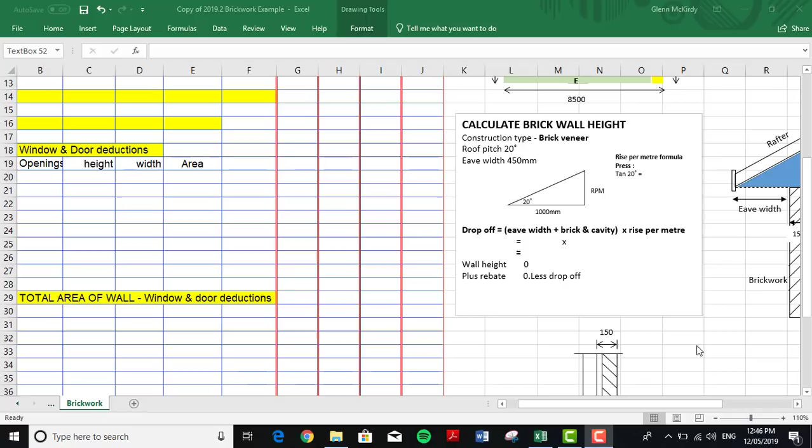Hi everyone, today we're looking at how to calculate brickwork. We've discussed this in class, and probably one of the first things we need to do is just determine the brick wall height. Now when we determine the brick wall height, we need to find out what the drop-off is. Now the drop-off goes from the top of the wall frame to the top of the brickwork. Okay, that's the drop-off height.

To determine this, it's just using the tan feature on your calculator. So because it's a 20-degree pitch, we press tan 20 and we get a rise of 364 millimeters per meter. Okay, now how we use that, there we have it there, 364 rise per meter. We want to find out this rise per meter.

So all we simply do, we times our rise per meter, which is 364, by our eave width plus this 150, which goes from the face of the timber wall frame to the face of the brickwork. Okay, now our eave size is 450. Eave width plus brick and cavity is 600. So we'll have 600 times our 364, and that gives us a 218 millimeter drop off.

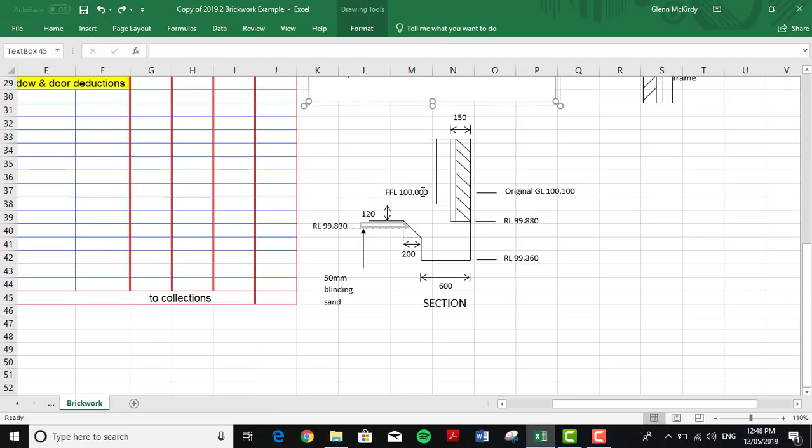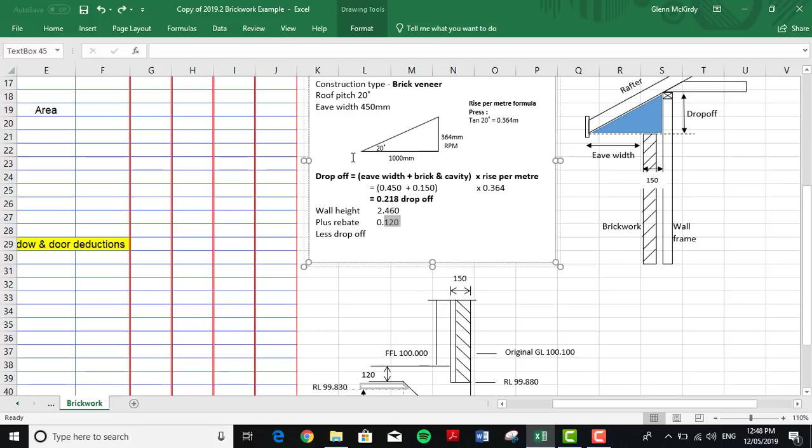Okay, our wall height as per plan is 2460. Then we go plus our rebate, and we find our rebate when we go down here. We've got the height of 120, but we can confirm that by 99.88, and the top of the slab, which the wall frame sits on, is 100. So there's a 120 millimeter step down there. So that's where that 120 millimeters comes from.

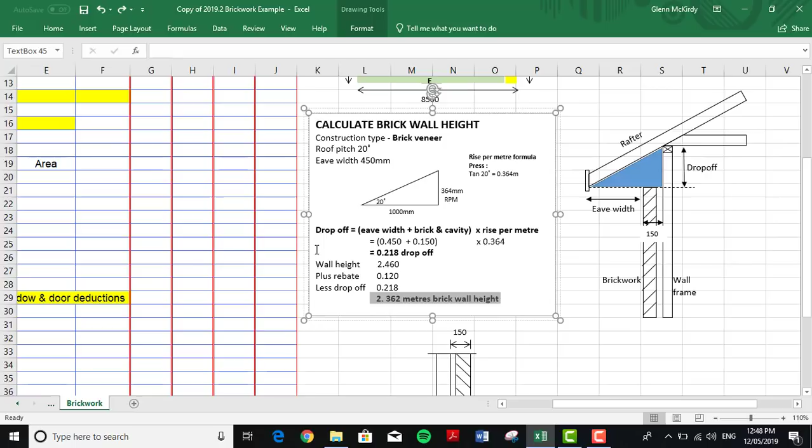Less our drop off, which we just calculated there, and this will give us our total wall height, which is 2.362. Okay, so that's important. So we'll come back to that. Now we're using the into-over method. We have our plan drawn here so we can visually see what we have to do. It just helps us, and every little bit of assistance we can get, we use.

So on our into-over method, first thing we do is we put down our A, B, C, D, E and F, which are our walls that go around the outside of the building. Then we put down our plan sizes. Then what we do, we come to our deduction, which is 110 mil, because that's the width of our brick. So we're going the width of our brick.

And on our internal corners, we can see that there is no deduction. 3.6 is from the outside to here. We've deducted a little bit there, but we've got the same amount added on there. So B and C, there is no deduction like all our other calculations. So they're our deductions. And then when we do the deductions, they're the figures we get. And then we get a total figure, total wall length using the into-over method of

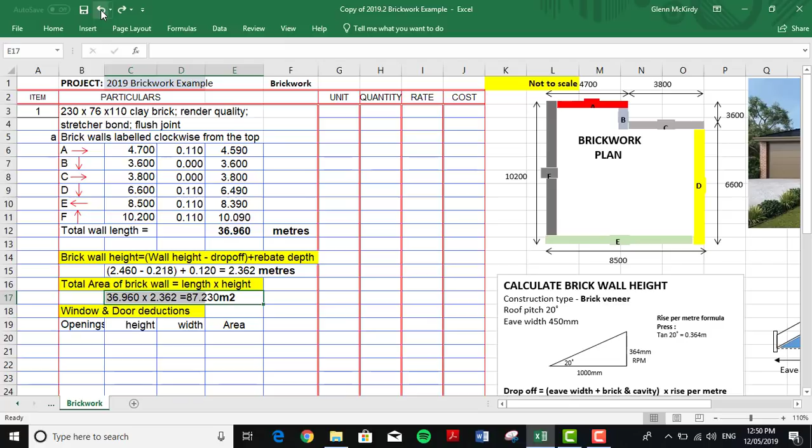36.96 meters. Okay, then with our brick height, which we've done the calculation over here, the figure that we got is 2362, and here we have it here. Now, our next step is we want to get the total area of the brick wall. So we have a length here and we have a height here. So we just simply times those two together, and we get an area of 87.23 meters squared.

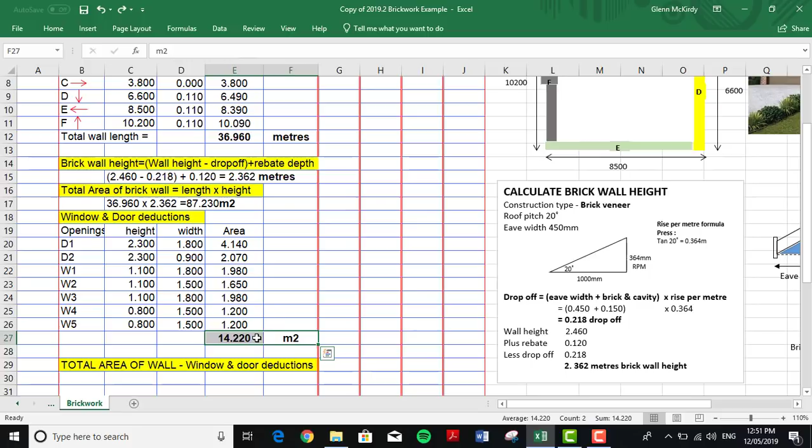Then we go through our openings. When we look at our plan and our specs, we've got 2 doors and 5 windows. So we need to deduct these openings where the windows and the doors are. So our first door 1 is 2.3 by 1.8. That's the area. Door 2 is 2.3 by 0.9. That's the area. Window 1, that's the area. Window 2, the area. Window 3, the area. Window 4, the area. And window 5, the area. We then get a total area, which is 14.22 meters squared in window and door deductions.

So what happens to get our total area of the wall minus our window and door deductions? So we have our 87.230 without any deductions, and then we have our 14.2 with our window deductions, which gives us 73.01 meters squared. Now how we find the number of bricks, we times it by 50 because there's 50 bricks per square metre, and in this instance we have a 10% wastage factor.

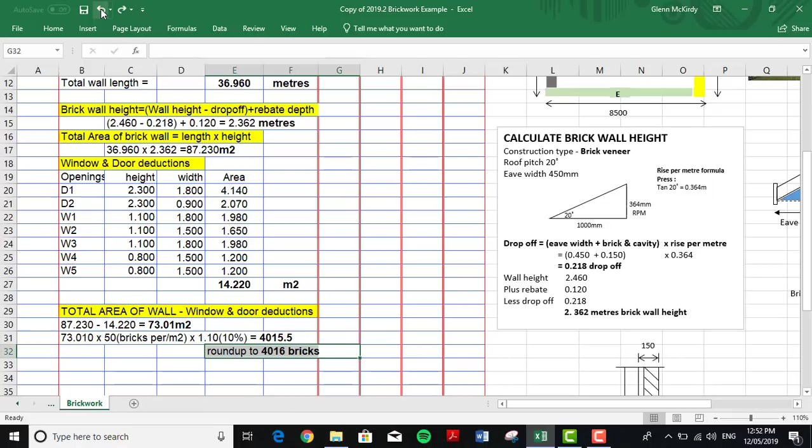So when we times it by our waste of 1.10, we get 4,015.5 bricks. We can't get 0.5 of a brick, so we round it up to 4,016, and then we simply enter that figure in over here, which was 4.016. All right, now that is in thousands. We put 4.016 because that's in thousands, 4,016. All right, thank you and good luck.